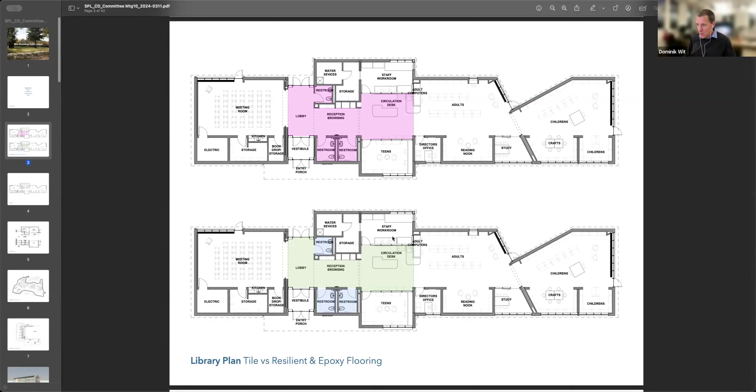To note, if we find that tile is too expensive to use on the job, we would commonly use tile on the wet wall. The wet wall is where the restroom fixtures are mounted onto the wall, where the plumbing chase is. Let me get my zoom happening here. So if we have tile, what we'd like to do is finish the lower portion of the wet walls of these restrooms with tile as well, down to an elevation of about 4 feet.

So you wouldn't go full height, and that's a nice finish for a wet condition in these 3 rooms. If we don't go with tile, then as I've mentioned before, we can go with a high grade spec paint that's washable and cleanable. Over a long period of time, I'd say you'd need to repaint that a few times considering the lifespan of tile.

I would not recommend bringing the epoxy all the way up. I've never finished a room in that way. I can look into see if that's an option, I don't know that it is. The epoxy you can use as a floor base, a base condition for about 4 inches, so I want to incorporate that as well.

If we do tile the restrooms, my sense is that we tile the wet walls as well, so a 4 foot portion of just one of the walls in each of these rooms.

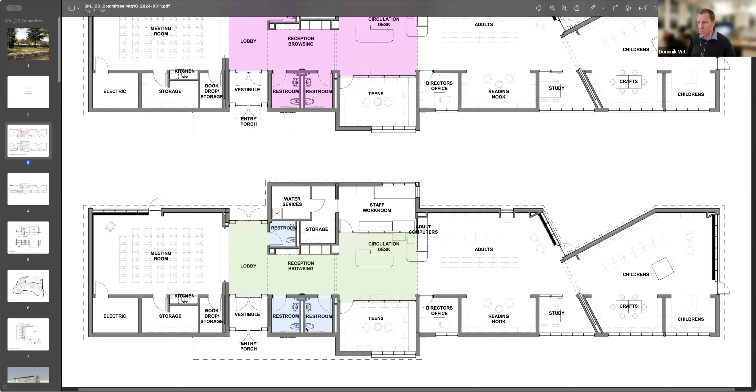Penny? Yeah, I'm just curious what this product looks like. I'm not familiar with it. Sure, the epoxy? Describe what the surface looks like.

The product we've specified before and found great results with is called Dur-A-Flex. I'll happily share some information along with these slides, though I don't have it for this presentation. I do have a sample piece in front of me, and if I stop moving it, you can see it has a speckled consistency. It's an epoxy liquid applied product, has a sheen to it, and is very hard wearing and washable.

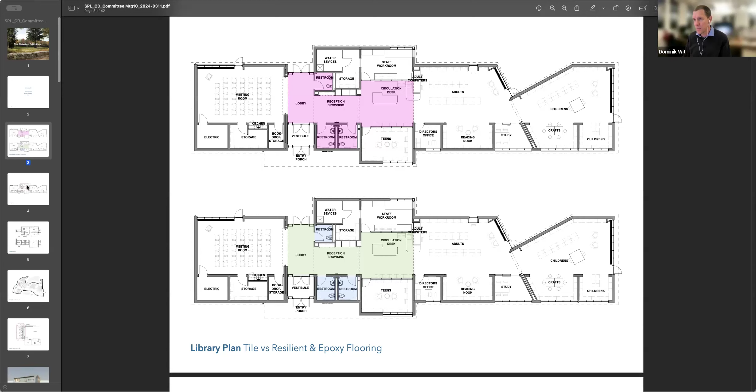Moving on to the restroom addition. Per code, we now need an additional restroom. But in this configuration, for this project, it does not need to be ADA accessible, because it's grouped and clustered in this portion of the building and close enough to two restrooms that are accessible. So all three can be allocated as gender neutral.

This new restroom meets all the space requirements for restroom fixtures, yet is as small as it can be for comfortable use. I've actually grown this room a little bit for more clearance, just so it's not, as I promised before, the smallest restroom you've ever experienced. I wanted it to feel comfortable, and we have the space for this.

There were many iterations as to how these three rooms laid out. We investigated whether we could get access directly into a space here, if the water service room was to hold this space, but we couldn't get the pull clearances to work on this wall. We looked at smaller doors, which were appropriate for the water service room but not for ADA, and combined with the clearance distances we needed on the wall, it just didn't work no matter how we twisted and turned this glazed wall.

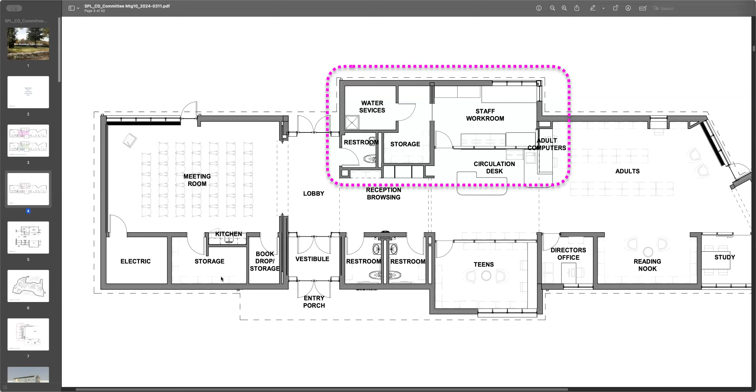Penny, I just realized I had these blow-ups here. It's a bit easier. Yes, Penny.

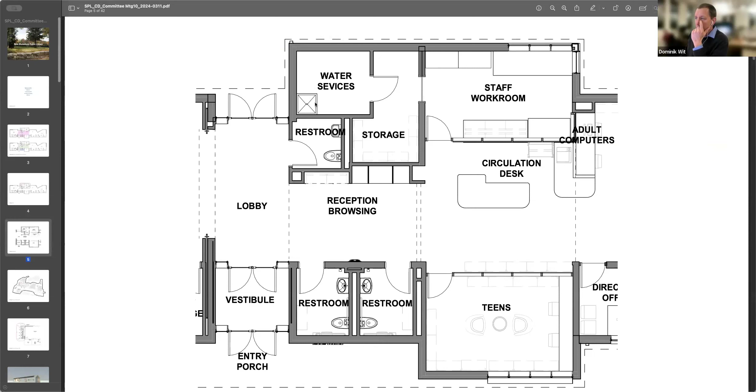There's no way to access water services through the third restroom - you looked at that, yeah, because of pull clearances. Currently we have an outswinging door just to meet, as a worst case scenario, for however the well dig goes or the test results. I'd like to invert this once we're in a safer position, when we have more information, and there is potential to change things around a little bit. I do know we have duct work coming fairly low here, so entry into this space is a little constricted because of that. What we're doing is strategizing the water services equipment underneath that duct work, sharing clearance spaces. So it's a strategic layout in water services that doesn't really allow for the entry door through the restroom at the moment. Yeah, Heather?

Just thinking about that door and the challenge of swinging out or in - is there a reason that could not also be a pocket door? I don't know if there's a code thing with water services. It's a good question, I will definitely run that past my engineers and see if that is a potential.

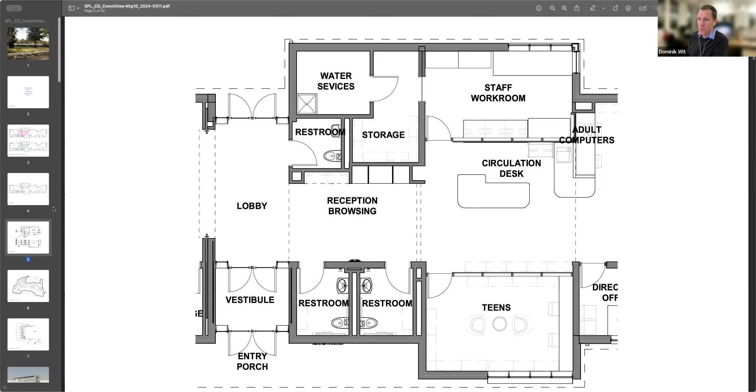All of this was possible because the roof footprint has been manipulated such that this added square footage to the building still has the roof footprint at 4,998 or 9 - it's really right on the button. We do have a bit of flexibility in how this upturned roof projects, so I can play with that a little on our comfort factor, but I've pushed it to the edge to make this work. I do have renderings for you to get a sense of the roof eave without rafter tails now - it was a 15-inch overhang, it's now 8-inch. And I've got some roof gutter and roof information for you later as well. So that's really everything as it relates to how this all laid out in the end.

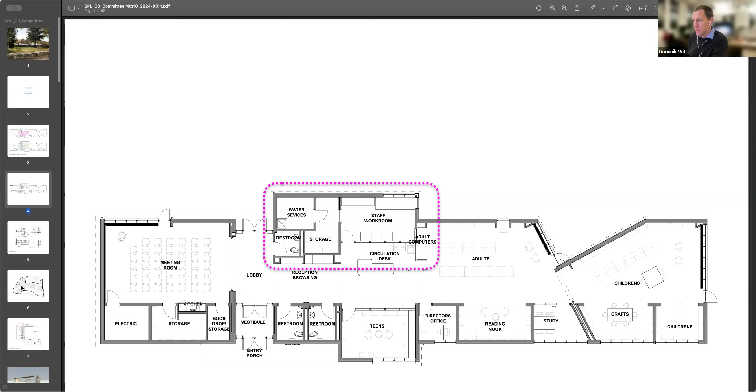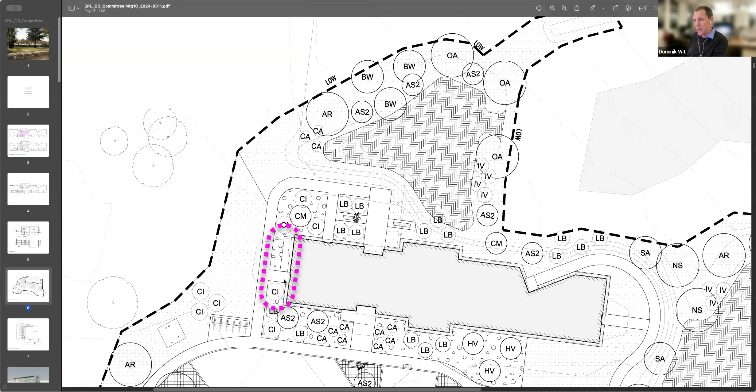I'm happy to move on if there's no other questions. Before I go to the renderings, I'm going to show some views of the back of the building, the south elevation. This is an old planting plan - our landscape architects are still working on updates here, but I wanted to highlight that initially we had an exit door out of the meeting room. That is not there anymore. We have now been able to house all our mechanical equipment, the condensing units, in this zone with a planting bed in front.

So I just wanted to bring that up before I go to the renderings, so you can see our strategy now to have the condensing units, mechanical equipment on a concrete pad exterior to the south elevation, 5 foot by 20 feet. The refrigerant lines will enter the building through the exterior wall at the water table, elbow up into a furred out wall condition, and enter the electrical room at the roof. By code, these need to be 14.6 above the electrical room floor, entering up high to then serve the mechanical equipment throughout the building.

This was our VE strategy, so we wouldn't need a below-grade duct bank to get these refrigerant lines into the building. It also means these lines are coming into the building down low and won't implicate the slate siding at all. So it's the most efficient way to get them into the building.

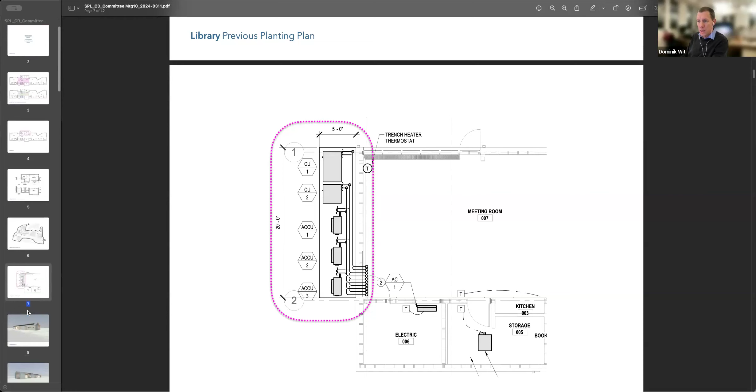So with that, there's a couple of views. Initially this is a little more schematic as we're in a push to get documents together, but it gives you a sense of the new roof with the upturned roof, with the reduced eave overhang. So not a large variation in concept to what we had initially.

There are not going to be any gutters here. We've consulted with Garland and our civil engineers about how the drip strip, the gravel drip strip, and rainwater running off this roof will work. We have every confidence that's going to work the way we're designing it, so rainwater will sheet off and collect in the gravel bed beneath it. That gravel bed will finish at the perimeter of the building at these locations where water is sheeting off.

There may be instances where there's light rain and the wind blows some of that water back on the slate. It's something we're not concerned about. We're worried about high volume water, what's going to happen to it, and in those instances it's going to be caught in this gravel drip strip.

This upturned roof has—I'm blanking on the term now—the roof is basically going to divert the water to either side, and be caught in gutters and cricketing. Thank you very much.

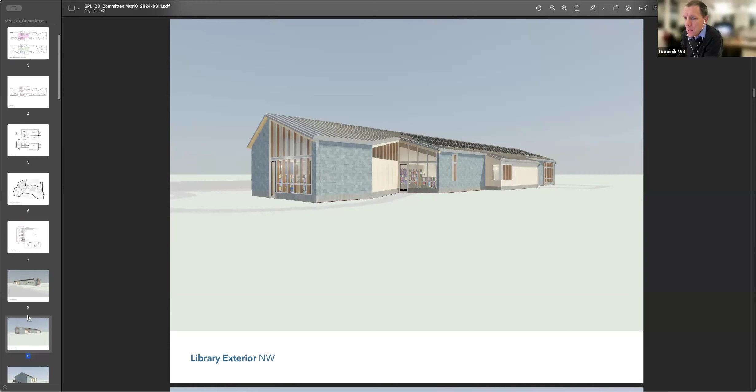So now the south elevation—again, this is a very high level, but we've represented the equipment true to size. This is about 6 foot, the very top is around 6'6" or so. So these lower units, obviously, the refrigerant lines are going to run behind them and enter the building somewhat behind this unit right here. One thing we're still working on is all the metering and the roll-up generator hookup.

There's equipment, wall-mounted panels that are going to be mounted on this location here. No gutter here, and again this upturned roof here will capture the water being directed from the cricketing there.

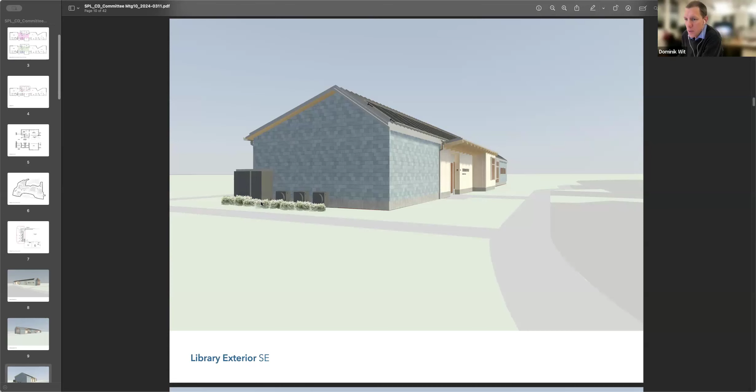We did discuss screening this mechanical equipment, but for where the project is at, we felt simple planting was the most economical and appropriate way to somewhat screen these elements. In due course, this could be handled differently with lattice and other kinds of screening potential. The last view here again is showing the same equipment.

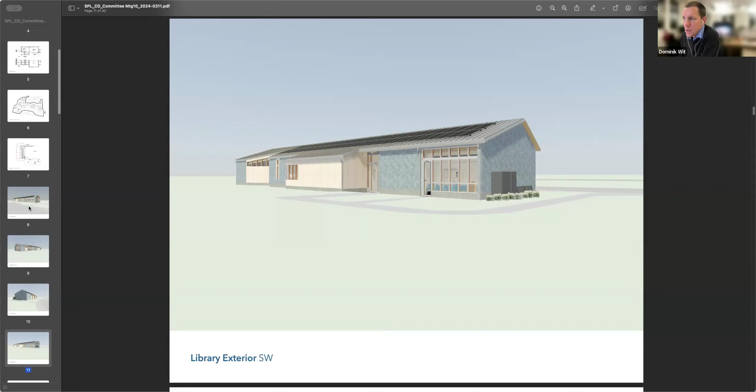We have a gutter here spanning this full length because we wanted to protect the exit door to the meeting room and the lobby exit doors. We also have the gutter here at the staff workroom. What is not shown is the louver I mentioned before - this exhausts air for the mechanical system. This is our exhaust area, and there's an intake air louver over the director's window, not currently shown, but it is in our elevations.

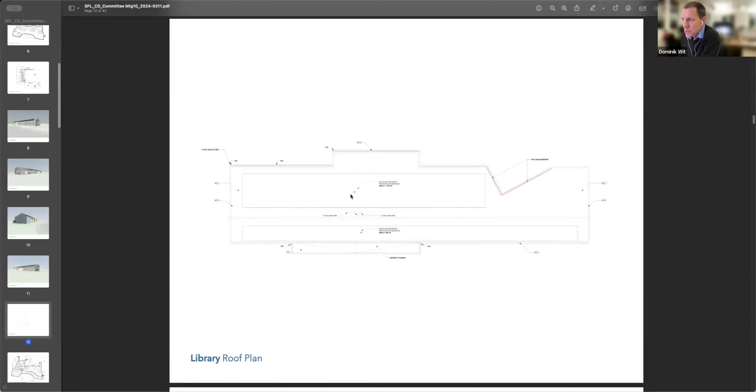Lastly, the roof plan - it's a little faded, let me zoom in. This is the upturned roof, cricketing to the downspouts. We have a metal rain diverter to carry water away from this exit door, the staff workroom gutter with a downspout, and then this gutter with 2 downspouts to serve that.

That was it on some renderings, mechanical equipment, and guttering. Also to note, we are going to include gutter box guards for leaf maintenance to help protect these gutters from leaves and reduce maintenance.

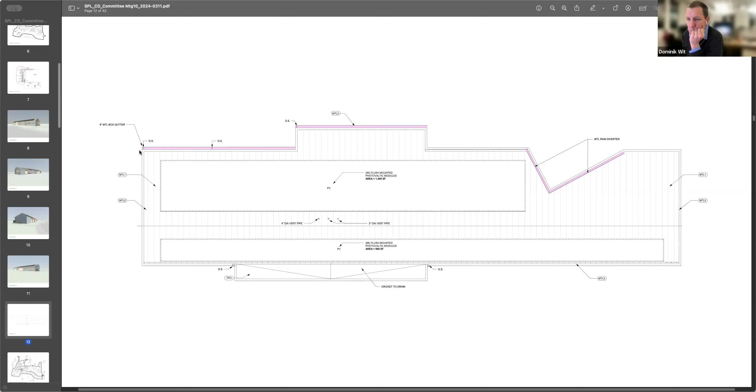Moving on, I have a site plan. I wanted to mention that we are currently holding 2 charging stations per code. The electrical code requires that you provide 10% of the parking lot to be charge ready, so we're not going to install the charging unit, but we will provide the conduit and infrastructure for that. So we are currently holding these 2 spaces.

We did not slip it all the way over because a potential charging unit here would encroach on the clearance requirements for this transformer pad. This transformer pad has moved over slightly so it has full adjacency to the asphalt parking lot. It has stringent clearance and adjacency requirements, so we've shifted the two across.

Initially we had them here, but we wanted to keep these 2 parking stalls available for patrons without electrical vehicles. There's no code requirement to give them priority location. There is a recommendation to make the charging station accessible, but it is not required.

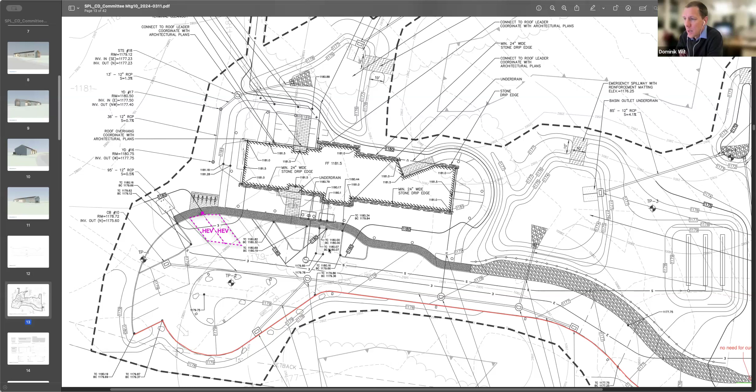Marianne, we have also been discussing whether we provide an accessible charging station so that we can potentially go for a grant - there's a charging station payment from the government, right? Right, it's a grant from DEP. So to meet that grant, it sounds like they will provide full funding for any charging you have on your project. But you have to have at least one handicapped accessible.

Correct, so if we're to go for that grant, we feel that we need to locate an additional charging station over here, which would mean coordinating this curb cut a little bit. We can put one of the charging stations oriented to one side and then we would meet that requirement. There'd be a slight inefficiency in running conduit to one and then the other, but if the grant provides funding to pay for that, that would be good.

We have to meet the accessibility requirement for a charging station. You need this clearance zone next to one vehicular parking stall, and that's something we just can't get into this scheme with the transformer pad where it is. We were considering making one of these handicap, but we're so constrained here making the different types of parking work that we feel the potential is to just split them, one here and one here.

But does that mean we're giving up one of our non-EV handicap parking spaces? So to meet the electrical code, this one over here will not meet that requirement - having one charging station serve the 2 handicap stalls will not meet that requirement. But to meet the electrical code requirement, it doesn't have to be accessible.

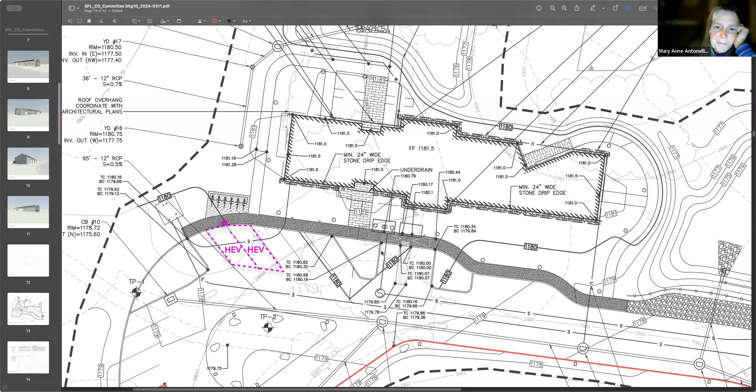Okay, so let me know, Mary Anne, how things go with this. I'm struggling to see how we can make it work with this plan, or to meet the accessibility requirement. It's all about that clearance portion, that's the tough part.

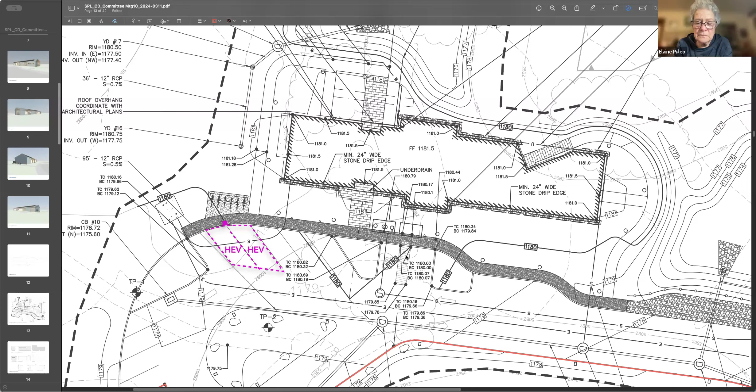As soon as you have more information, we can own scope. If we own scope in the 75%, really the intent is not to pay for it with the project, it's to rely on the grant, except for the conduit getting the power to it.

Right, that the grant does not pay for? No, the grant just pays for the stations. Got it.

Okay, so let's own scope so we understand what that is. Because I don't even know what the payoff would be, the grant will help, and we need it for code. But I don't know if we can't go for the grant if we can't meet ADA.

And we're struggling to lay out ADA. But let's own scope for now and we can make that choice. Okay, great.

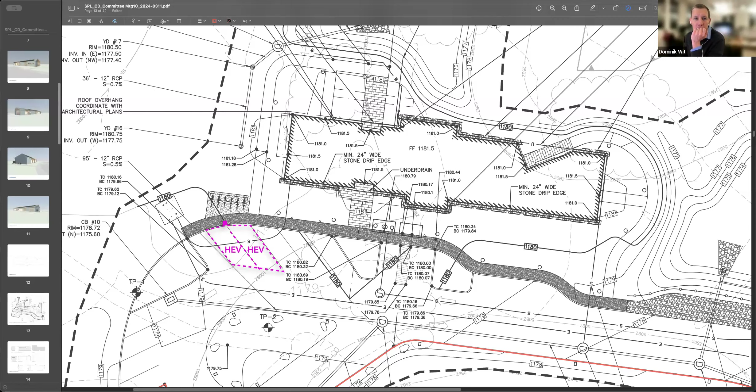Okay, so that was the charging stations. Millwork, we've been fine tuning. The circulation desk now is a single surface countertop, and previously we had shown a book drop that was integrated into the surface.

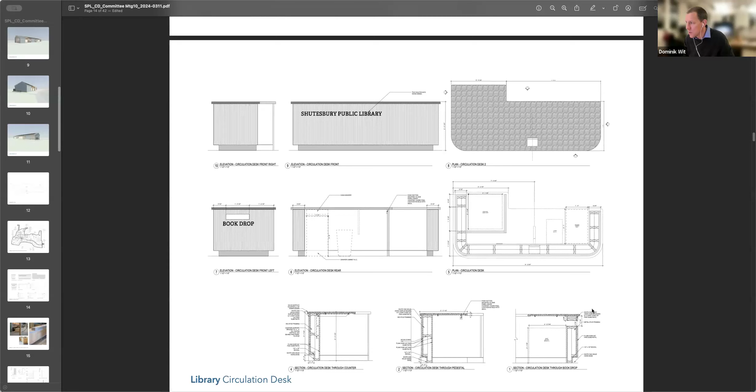There was kind of a horizontal slot condition here. We have now revised that so that the book drop slot is actually made in the side portion of this millwork piece, and you can see here in the section. Normally we create a book slot chute so that you just have to let go of the book and it drops in. The caveat here is that you would have to manually push it through the slot and into the book cart. But this will work.

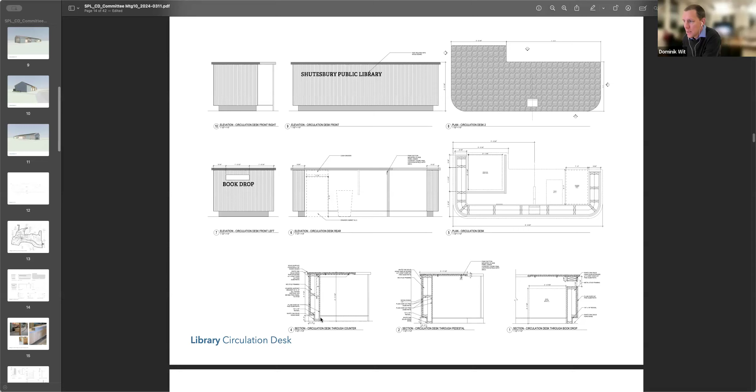And we think is a nice solution. Also, there was a question about the finish for this circulation desk. So we currently have white oak boards, shiplap configuration, stood vertically as the main finish. The solid surface top is hard wearing and can be specified in any color, which we like. And so I've got some photos in the next slide where we did this at the Norwell Public Library.

So this is a shiplap maple board that is stood vertically, you can see it here. But we are specifying white oak, which has a slightly more yellow finish, which we like, and we've used that as well. This info desk is finished in white oak, and I wanted to show you the maple is slightly desaturated on the yellow hue, but we like white oak as well, and we're currently holding that for Shutesbury. It ties in with the Douglas fir nicely, which we're using for the mass timber portion of the structure. The expression of boards we really like because it's tying in with what we're doing on the roof. The roof decking is tongue and groove, so you get this pairing of that language, which we like. I just wanted to present that since there was a question last time about it.

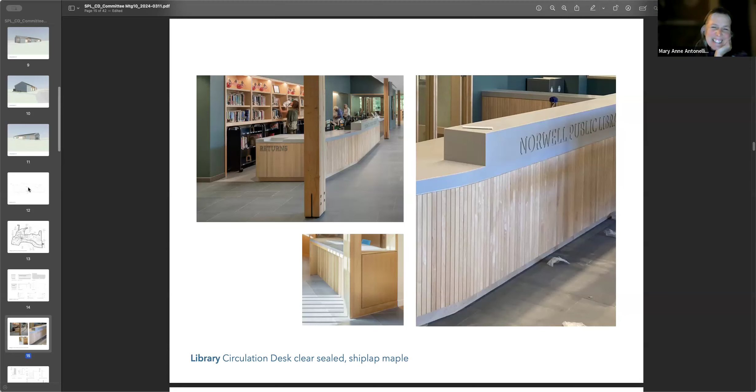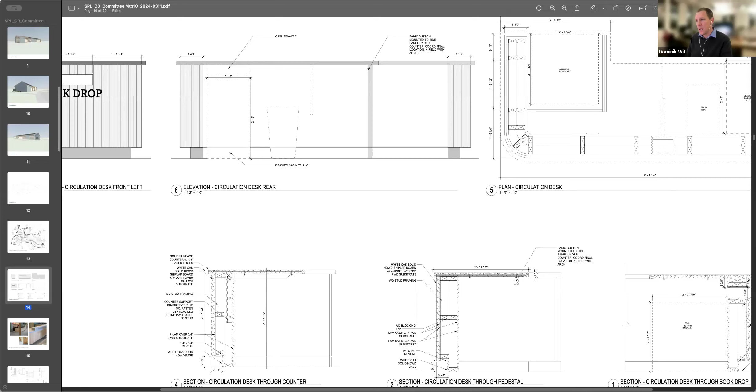And when you say a solid surface for the counter, what do you mean? So this is a plastic-like material. It's a hard wearing solid surface counter that is incorporated into the framing, and it's eased, so it has a smooth edge, and you have many different color choices. So it feels very smooth. It's a through body material, right? So it's not laminated. Laminated is a small veneer, whereas this is a solid plastic composite material. So you can chip at it, and it has a through color where you won't tell that there's a difference in color on the interior. It's a nice, smooth, tactile, hard-wearing surface. You can see here.

Yep. It's our most common finish for these circulation desks. It's kind of stood the test of time, holds well, and it's tried and true in our office. So, Dominik, are you saying you're speccing the maple or the oak for this? White oak for this project. I'm happy to go to maple.

The metal shelving will be encased in maple ends and tops. That's kind of our normal standard finish for the wooden shelving. But the choice to specify white oak is so that the circulation desk has a little bit of its own identity, set apart a little bit from the maple shelving. And it also ties into the mass timber.

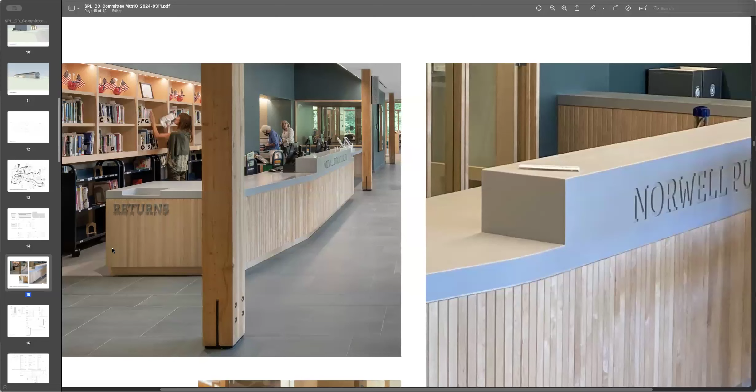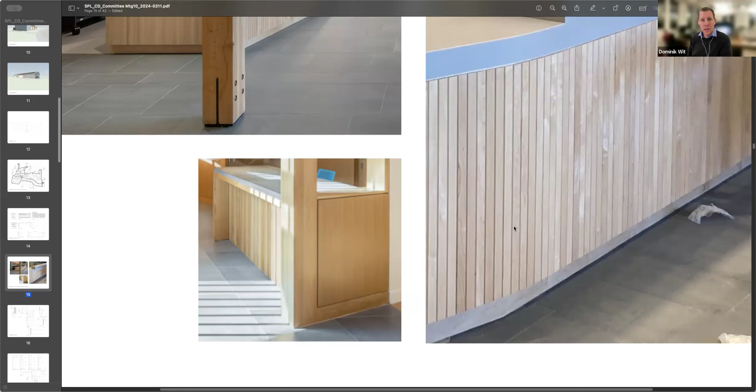Does one have a warmer tone than the other? Because I'd vote for the one with the... I think the white oak does. Yeah. Yeah, I would go for the white oak. So the white oak is on the left and the maple is on the right. Correct. I would say maple is a little more desaturated, right? So the yellow orange color of wood is not as apparent. The grain you still catch in both, right? So it's still a very nice way of expressing the wood. But our choice initially was to go with white oak for the circulation desk. I agree. I agree too. It's very traditional New Englandy. It's a great species. Yeah, it's beautiful.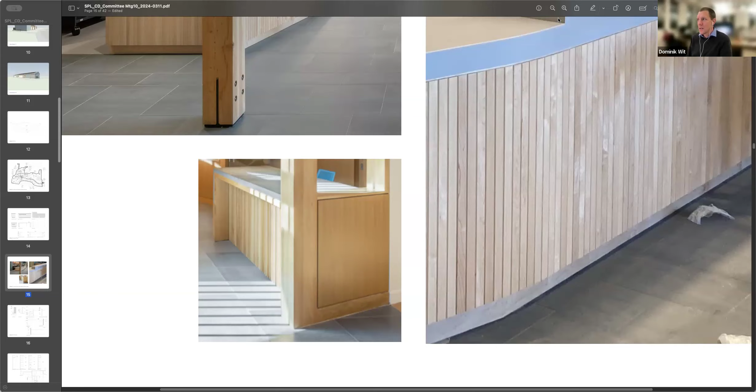So I wanted to just offer that up. We also made some revisions as we were coordinating with Mary Anne on the use of the self-checkout station. We have now incorporated this printer station set down lower to the self-checkout, so that the printer can sit a bit lower and not be as visibly imposing to the sight lines from the staff workroom to the spaces around. It also has base cabinet doors now so that printer material and paper can be stowed away in a clean way.

And we've cleaned up where some of these outlets are. We have an outlet beneath the computer counter and two pop-up power outlets so that patrons don't need to feed their computer cords down through a grommet. They will have power at the counter. We do have a through counter grommet at the self-checkout because that'll be a one-time installation where we will have a Chromebook self-checkout interface here, and the outlet will serve that.

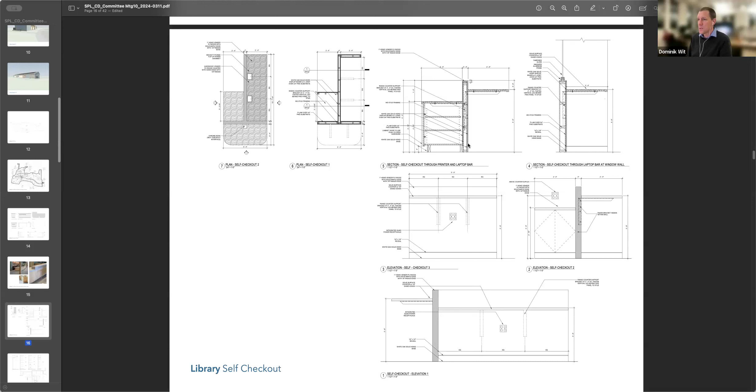So, tweaking the details. And lastly, the library of things.

We've revised this slightly. I believe this is the last iteration everybody has seen, but just to go over it quickly again in elevation, we have the browsing metal shelving niche here with sliding panel doors, kind of a low spec, but a nice way to conceal storage in this niche above browsing.

To the right is the library of things. We have two equidistant shelving units here with adjustable shelving. This is a fixed vertical and horizontal portion of this millwork, which divides storage from up and down.

So the lower portion can house a telescope and cooktop, and above, in the summer seasons, can store the life jackets. In the off season those rods can be pulled out and the shelving can be put back in for general storage.

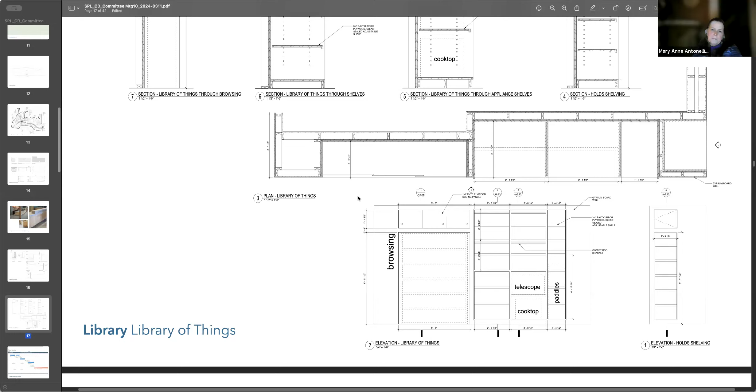This right portion here is for paddles specifically, so it has its own width, but it also houses adjustable shelving. So when you don't need to store paddles, you can put the shelves back in. Full flexibility there. This section outlines the ability spatially for all of this to fit.

Things were tweaked as we continued to coordinate that. And lastly, around the corner, so this is a plan cut.

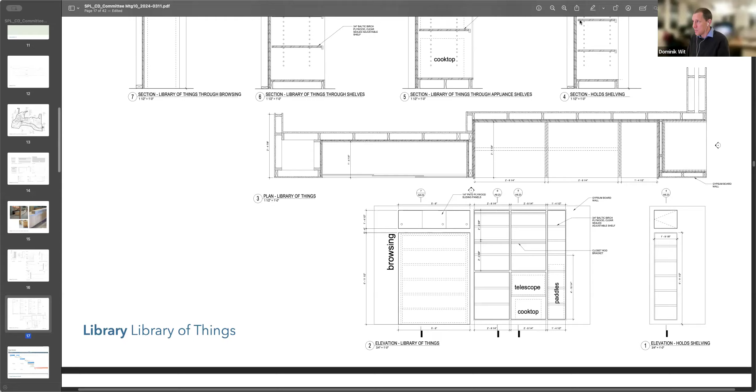So to the left here, we have browsing, library of things. And as you make the turn to go to the staff workroom, and the circulation desk is to your right, we have holds here. This is a small elevation for holds where we have adjustable shelves because we can't get metal shelving that's

21 inches wide. So this is treated similarly, adjustable height shelves, and then there's a storage cabinet above with a door for additional storage.

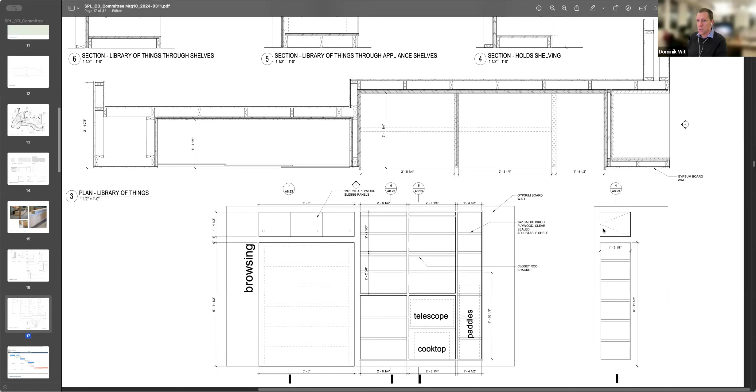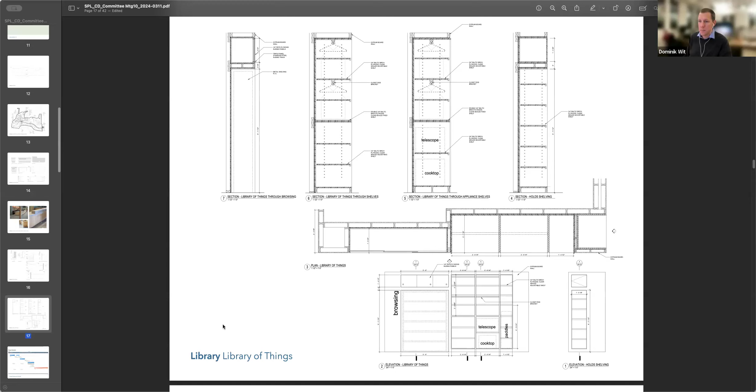So again, trying to simplify this millwork piece, but yet still be functional. Be interested to see what savings were realized at 75%. So that concludes what I have to show today.

Schedule, nothing has changed. Again, we're aiming at the 75% at the end of this week, and then 100% will be April 19th.

We heard back from Ngrid, just another kind of, as it comes to mind. We were consulting with our engineers today, and Ngrid got back to them to confirm that we are tying into the pole at this location here. There were two poles that were potentially up for grabs, so glad to hear that we were able to tie into this one, so it's a more efficient way to run our duct bank.

We're going to again price overhead wiring versus duct bank. We're now pushing on Ngrid. Initially they gave us the design for the duct bank run. They are now working through the change order for overhead lines. So we're really pushing on them to have that in 3 weeks, so that when we get our cost estimate in 3 weeks' time, we have that number and can get a good understanding of which way to go, and whether it would be much cheaper to go with overhead power lines.

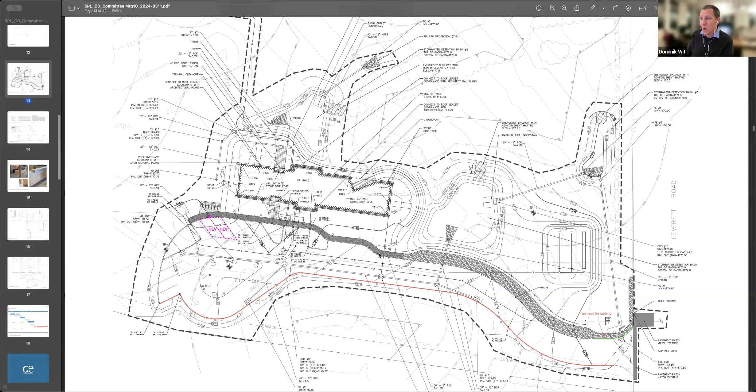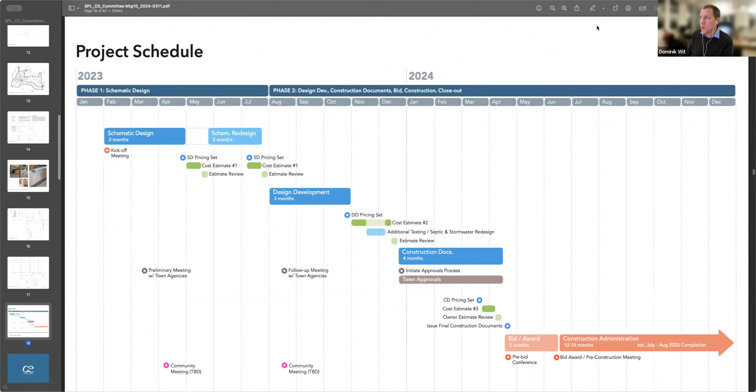Great, and so that was Ngrid. Yeah, so everything's going well. Glad that we got through the additional restroom requirement.

And the library is also presenting to Conservation Commission, and I'm happy to throw it to you, Mary Anne or Penny, with regards to that.

Right, so because of the change in the parking lot, the reduction in size, it's not the exact same plan that we submitted in our NOI, so we have to go back and show them that. With Penny's help — well, Penny did everything and then I just emailed it — we emailed them a letter letting them know that there's a slight change and that we want to show it to them. So this is on the Conservation Commission's agenda for this Thursday night at 8 p.m.

And Dominik, you'll send me this plan and maybe show and depict on it how it's different from the other plan.

So I'll go to that meeting because Penny will be away and Elaine will be away. And then the standard procedure is that they schedule a hearing for this.

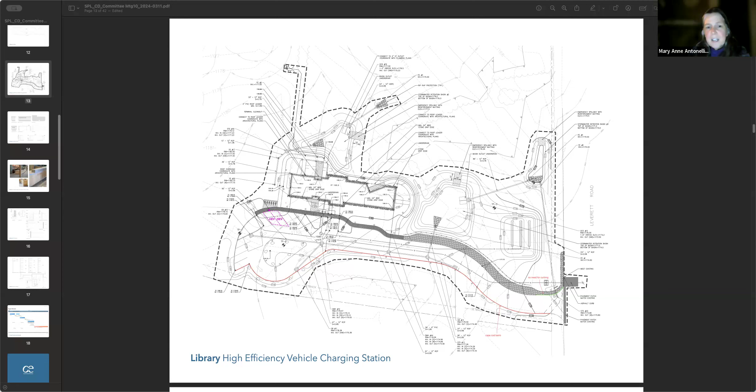I have a question about the schedule, Dominic. So this Friday, you're sending out the 75% to the cost estimators. And then when do you expect to get that back? Two weeks.

So then, we're hoping what we would do is share it with the committee as quick as we can, with the caveat that we're still reviewing, so we have kind of an order of magnitude that we're all understanding. There's always discrepancies with these things, and it always requires a meeting to consolidate and really review and make sure that all the scope was accounted for correctly. So we need our consultants to help with that too. We're going to try and fast track that into less than a week and come to you with the real number.

April 2nd, you think would be? Let me see, because two weeks... wait, two weeks is the 29th, and so the second would be the next Tuesday, the following Tuesday. But that only gives you a couple of days. You need a week to digest it with your team, Dominic. Is that what you said?

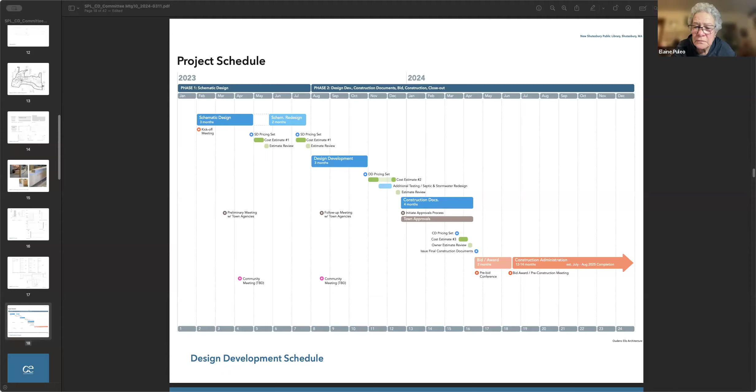Do you want to quickly talk about the well and vote since we have a small group here tonight? Yes. So, Penny and I have been working with the well driller, Cushing and Sons, and Steve Sullivan, our highway superintendent, to chart out a path to the well location and be prepared. The highway department has to put down some gravel for the very heavy well rig to get out to the well location.

And the gravel is going to cost up to $4,000, which we have to pay for because the highway department doesn't have that in their budget. I think we should also be prepared to buy some straw wattles, which are erosion control doohickeys. Those are $25 for 12 feet, and he needs quite a bit of that. So I would like to make a proposal that we approve spending up to $4,500 for gravel and erosion control, straw wattles.